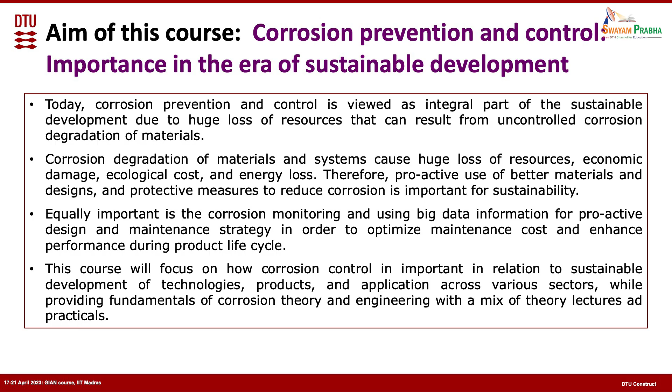So you got an overview, right, of different things. So can we say that the course is successful in that sense? Yeah. So then I put together some of the things just to get a kind of a glimpse of the thread of what we did.

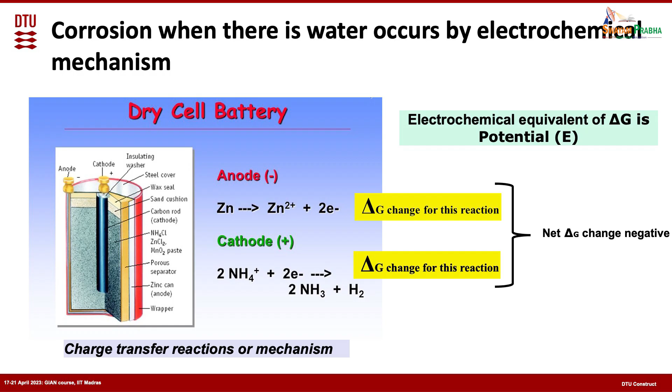So we started discussing corrosion theory, right? That's the basis at which we started, looking from the thermodynamic point of view at why corrosion is happening and what the thermodynamic factors involved are. We started from these fundamentals, then connected that to the electrochemical corrosion mechanisms, and understood how the electrochemical corrosion mechanism is different from dry corrosion mechanisms. We understood the thermodynamic aspects, and from there took it to the kinetics part. There are two important parameters in relation with corrosion: the potential, determining the thermodynamic factor, and the current, determining the kinetic factor.

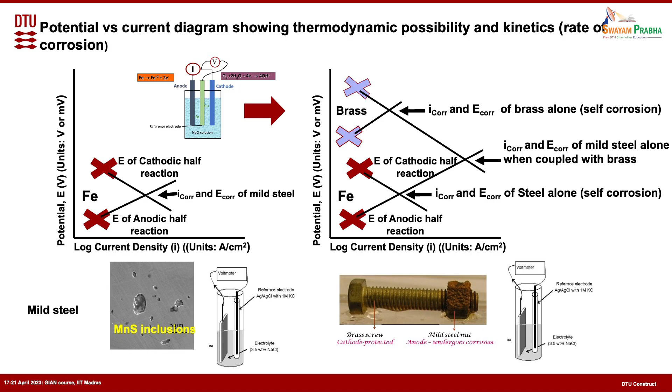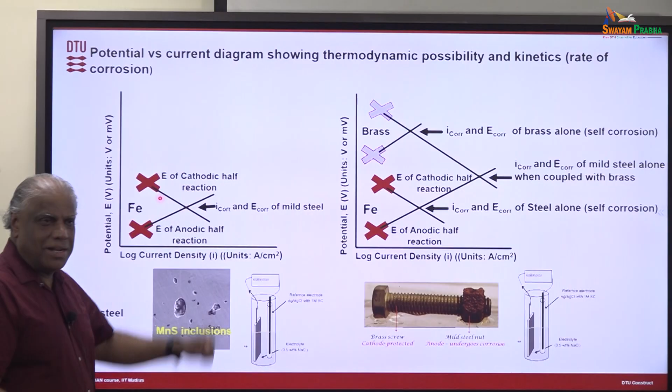And then we understood how the single electrode potential relates to each of the half reactions, and that becomes the building blocks or bricks to build up the electrochemical process. These half reactions are the small bricks. If two bricks come together, you have a mixed potential. Instead of two bricks, you can have three bricks, with more additional cathode reactions: one half reaction related to the anode reaction, two half reactions related to cathode reactions, then you have higher corrosion. Each of these is a half reaction, and you can put them together, stack them and understand theoretically. That's the main idea of the Evans diagram. So that way we understood the theory part of corrosion.

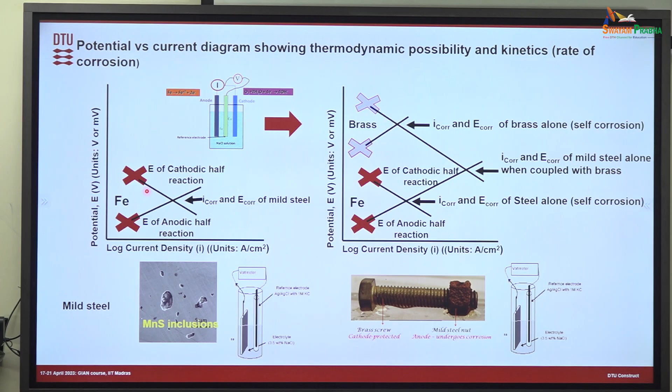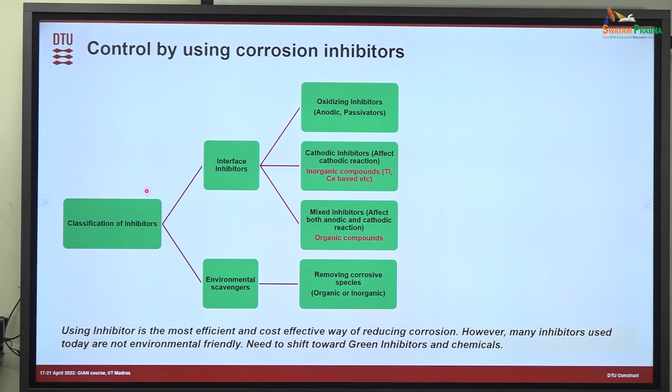Then we got into a little bit of the sustainability part, where we started discussing coatings and the chemistry of the environment, how that can be changed. In relation with that, there are many inhibitors used and different coatings, but the need today is to get these coatings into the green category. So we discussed that a little in relation to the inhibitors and the coatings. That's what we did. Anything more on that?

This is also the time to describe if you do something more in this area. You can tell that you also tried to develop a coating like this, because sharing the information with others will be good. Do any of you work with green coatings or green surface treatments? I think Lakshman's group, right? You work with it, right?

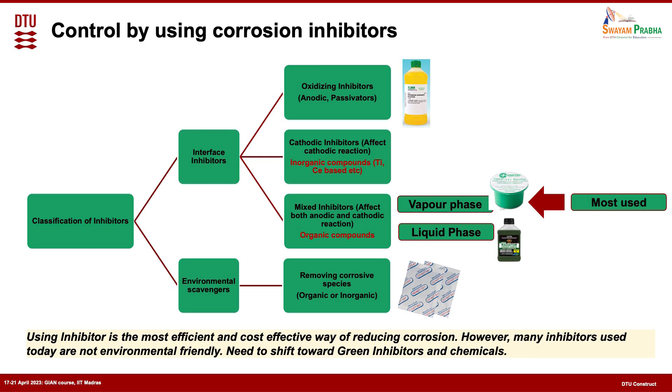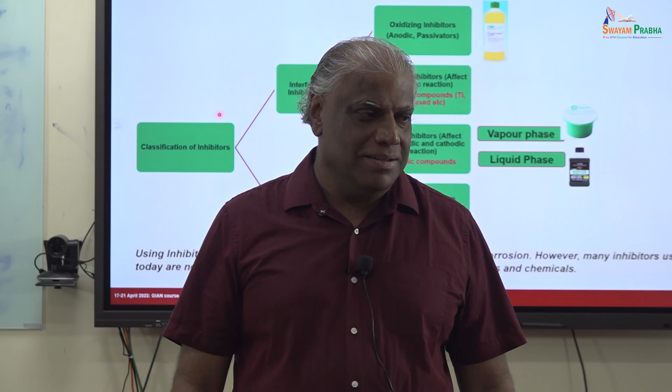What kind of things do you do? Self-healing type, right? You remember that we discussed the self-healing type of coatings at the end. That means that you are introducing the inhibitors into the paints. You can add the inhibitors.

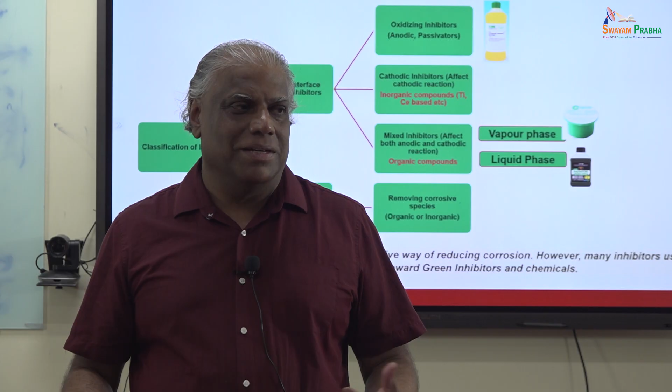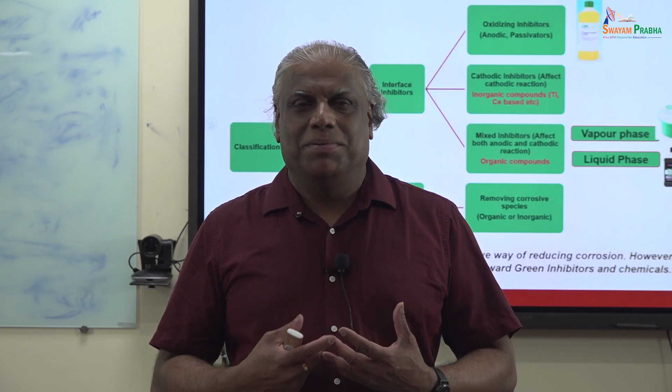You can just mix the paint with inhibitors, but that's not good enough because then the inhibitor molecules will be immobilized. But when you are putting it more or less in a container, a micro container, then when the micro container breaks because the coating breaks, you have a mobilized inhibitor. I think this is the kind of solution, right? That's what you are trying.

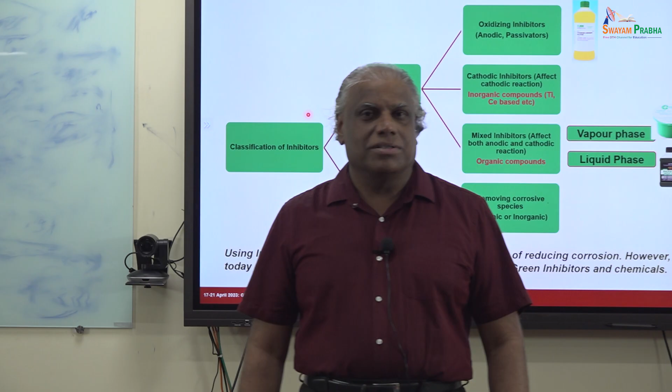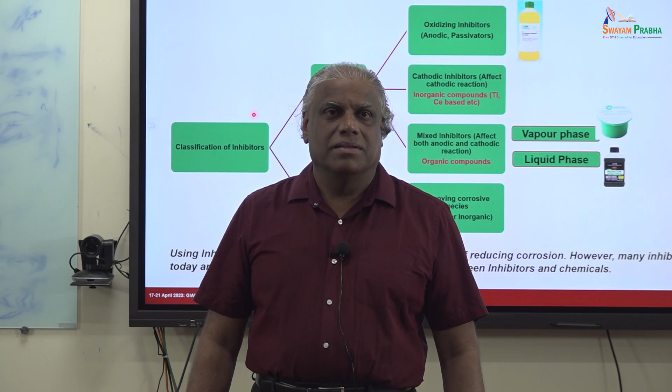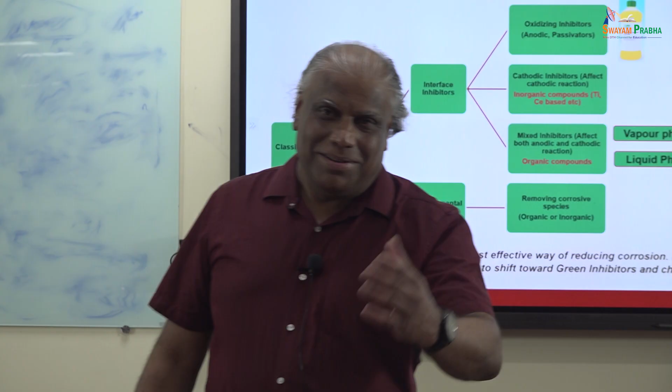You don't have to tell exactly what you are doing because probably it's also confidential. But you also try some green inhibitor chemistry or other normal inhibitors. So you also want to include the green inhibitor inside the capsules and things like that, right? Yeah. So that's an example, a PhD project, of such kind of things.

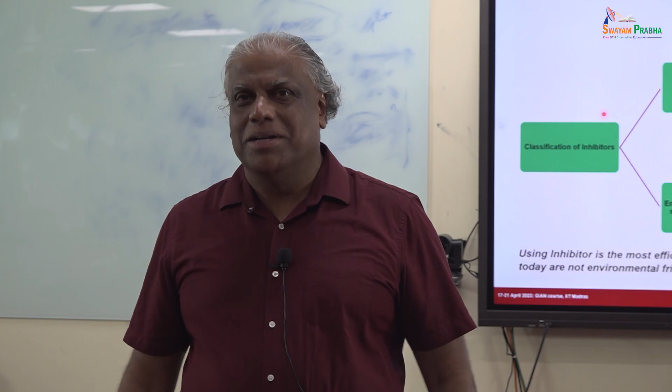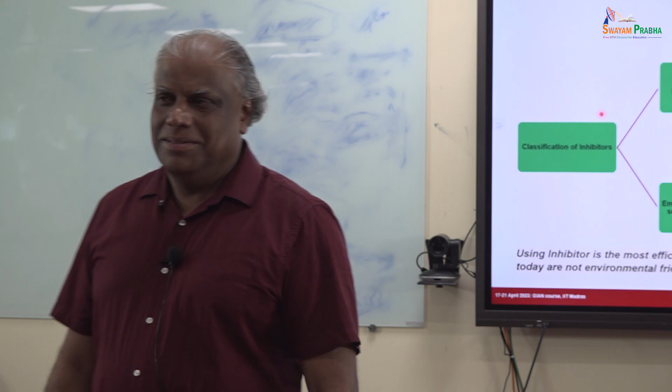I think there are many universities where people are trying to do things like this. The only thing is nothing is commercial yet, because it also requires a lot of work. Is anybody else doing anything? Green coating, green conversion coating, green inhibitors and like that. This is an area which you can work in. There is a lot of potential for research in that area. Anything more you want to know? Any questions related to that part?

As part of this, we discussed the green inhibitor, right? And we understood that there is a lot of potential for the green inhibitor because all the natural extracts contain heterocyclic organic compounds, which is one of the criteria for a corrosion inhibition molecule. But the only thing is that it's too complex at the same time, because these extracts contain many molecules, and there are so many different types of extract, and that is one of the difficulties

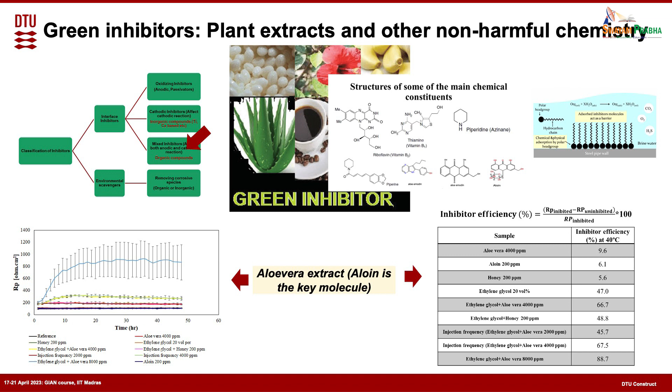in working with these green inhibitors. So you have seen that we approach that from the molecular modeling point of view, as a screening method for these green inhibitors, which is probably a much easier approach compared to doing the experiment. You can screen many molecules easily. Like what she was saying, there is a lot of potential related to green inhibitors, and it's a good research area to work in.

Then we discussed the pre-treatment, which is one of the important things because chromium has to be replaced, and nothing is there yet to substitute chromium. Many coatings have commercially come up which people use today, substituting chromium, like the titanium zirconium type of coating. I think the commercial name of that coating is Eclipse, which involves a titanium zirconium composition plus a polymer modifier.

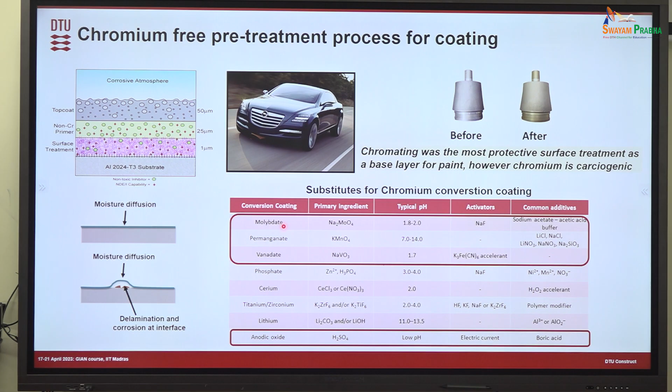That means that when the titanium zirconium compound precipitates on the surface, a little bit of this polymer also deposits with it, and that way the coatings become better. So that commercial process is available, called Eclipse. Then permanganate is also a commercially available process. I think it's a Swedish patent, and a Swedish company is doing it. So some alternatives have come up, but nothing is as good as chromium. So there is also a lot of potential in this area.

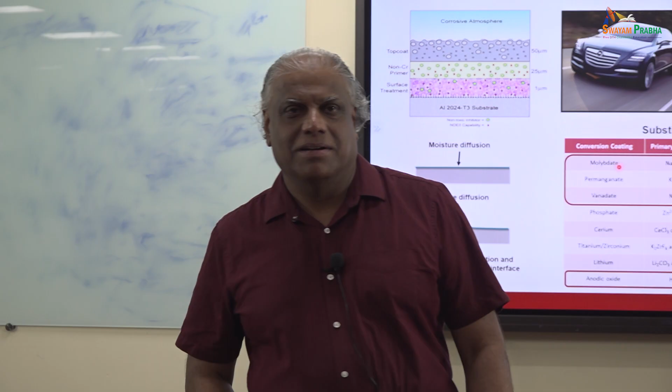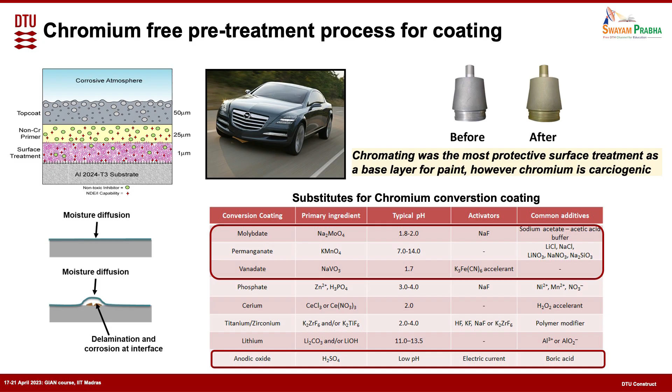Conversion coating. Anything regarding that part? Anything additional? Do any of you work on things similar to that? You are working on cerium. Cerium conversion coating. I think people are also working with lithium these days, right? They did a lot of work on lithium-based conversion coating, and I think quite successfully. He used to come and present at Eurocorr every year. Cerium is probably a substitute for titanium zirconium.

Then we came a little bit into contamination of the environment, which is coming from buildings and different applications. That area is becoming more and more important today because of environmental concern. And we discussed some of the research groups' work.

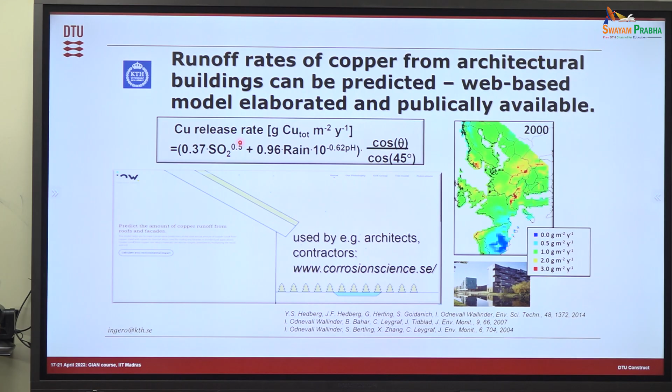In this area, they are trying to bring some empirical equations so that they can have some predictability. If they know these parameters, they can get a little bit of predictability related to the metal release, and that way they are also trying to get involved in building constructions, where they can even advise on what material could be used and things like that. So again, this shows the importance of the involvement of corrosion engineers in this.

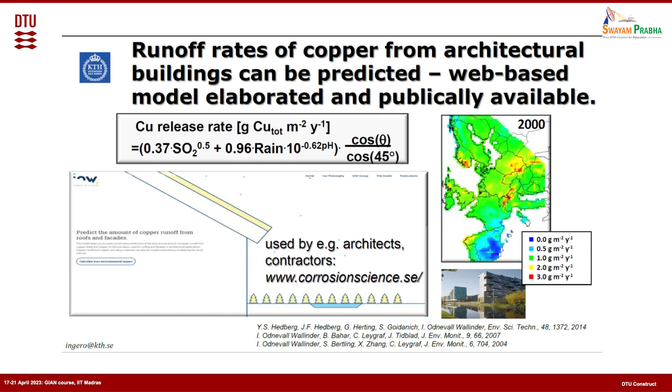Anything related to that? Then we had the recycling part. I think we focused on aluminum recycling, but recycling is important for all metals. There is a lot going on in steel recycling as well. Aluminum recycling has its own importance, basically because, as I told you, unless you recycle aluminum, it cannot be used.

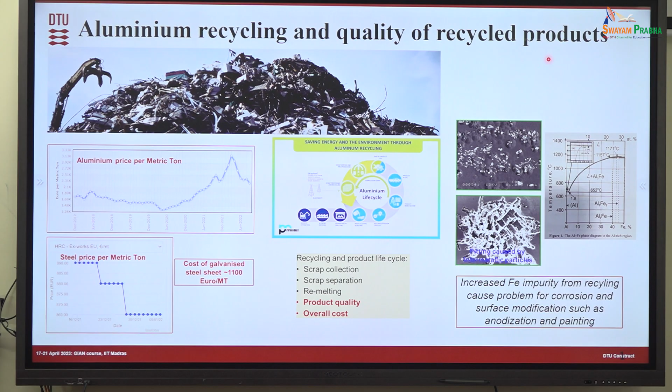In the cheaper applications, not aircraft, if aluminum has to be used more and more, then they have to use a recycled alloy, which means that all of us, metallurgists and corrosionists, need to solve those problems. Sometimes we cannot change the microstructure, but otherwise we have to make better protective measures and things like that. So there is a lot to do in that as well.

Like you mentioned yesterday when you came for the course, you understood that there is a lot to do in corrosion. So we can see that there are a lot of things where corrosion and materials engineers have to be involved. Maybe the recycling issue is much easier to understand, but for some of the other things I presented, initially we don't think there is a role for us to play, but there is a lot. With electronics, you think the electronic systems are failing, but corrosion is failing. Normally we think electrical engineers will take care of that, but for the fundamental mechanism, electrochemical and material related, we need to be involved.

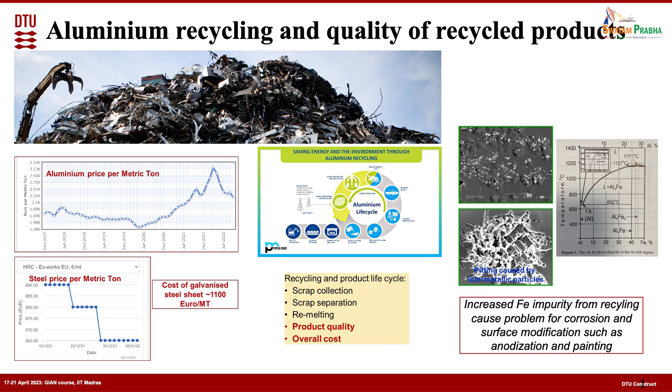And this problem will only increase, because these recycled materials go into the car, will come back, then get into recycling again. So it is a chain reaction. Of course, the aluminum people have also started thinking about that. So now they started using another thing called can to can. It means that the aluminum material used for a soft drink can will come back for recycling, but it will go back also as a can, because there the recycling issues and microstructure issues are a little less problematic. So that will not get into the automotive stream.

All automotive alloys going into the automotive stream will come back to automotive. So that way they can avoid the mix-up. There are strategies followed like that. But even then you will have more and more impurities, and the alloys get downgraded. So this is going to be an issue.

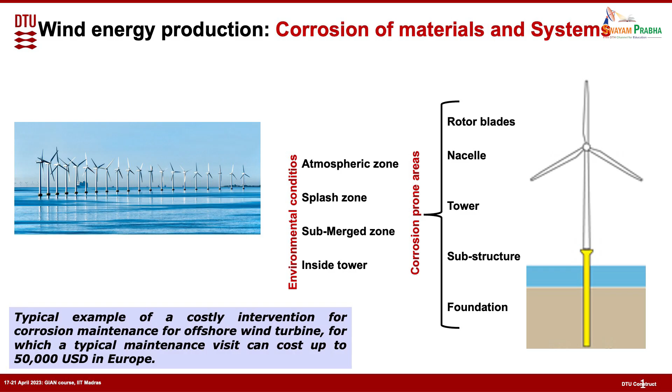Then we had wind turbines, low carbon technology, right? We discussed how corrosion is an issue in different parts of the wind turbine. It's a big structure, so it's very important to take care. There are many parts: foundation substructures, the tower, then the nacelle, with many things inside. We also discussed today how it is important to have a proactive design and maintenance strategy for such big structures.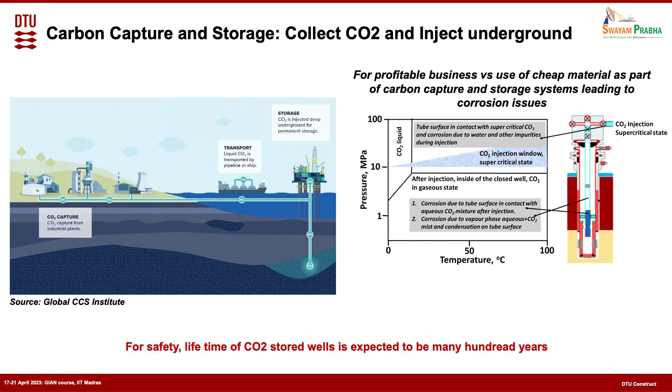Carbon capture and storage is another area we discussed, where I should say the corrosion issues are just emerging. Nobody really knows to what extent corrosion issues will be there and how they will affect safety. It is really emerging, and any prediction we make now is a wild prediction. It is just to give an idea for the operators, who need some level of understanding of whether it's safe to inject and things like that. But otherwise it is just emerging. There is a lot to do in this.

Then we talked about electronics, right, which is a somewhat different type of corrosion problem. Again, it's one of the important things today, and it's going to become more and more important with electrified cars and things like that, because the driving force is increasing. So as we have more and more electrified cars in India, you will start seeing the problem too.

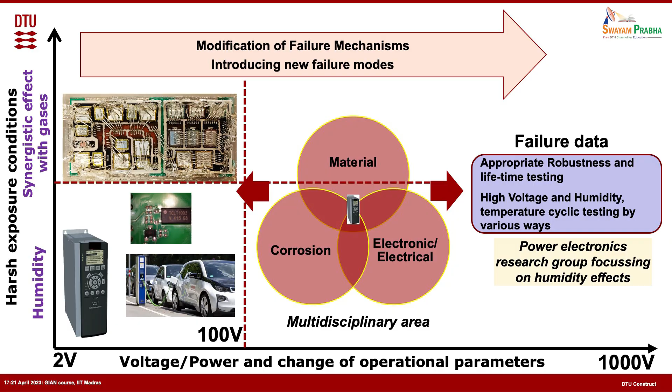Then we have the last one, this. Anything on this? I just put this slide, that's all. Okay, so I think that's the last one. So just let me know anything more you want to discuss.